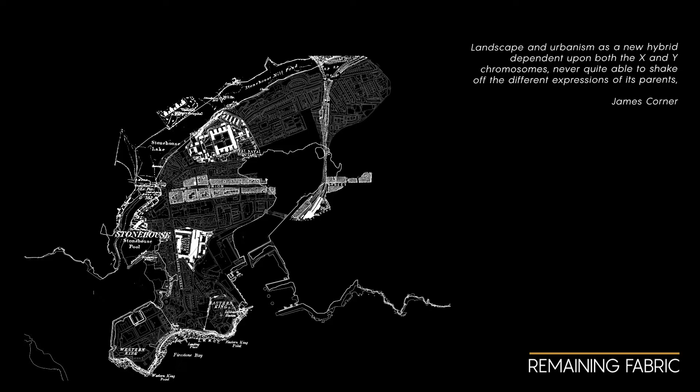This map analyses the impact of the climatic changes on the historical fabric of Stonehouse. The Union Street, which caused the north-south divide of the area, has broken down, and together with the reintroduction of Stonehouse Creek, connected the divided communities, giving them a direct link to natural landscape.

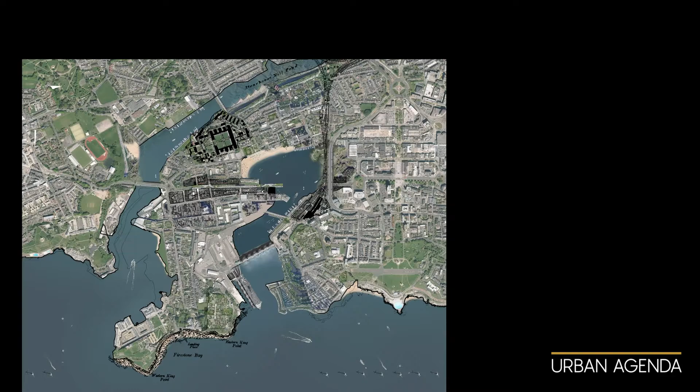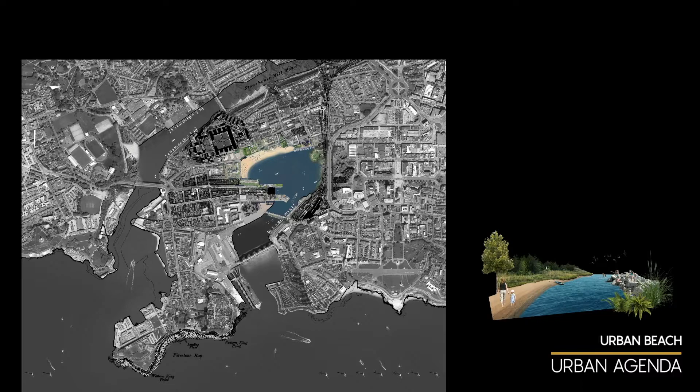This urban agenda brings together social, economical, and environmental aspects into one, giving the community areas where different types of wildlife thrive in marine environments such as salt marshes. This strategy incorporates leisure areas such as urban beaches, which can be enjoyed by the residents, who may also participate in horticulture and aquaculture that creates a deeper connection with landscape.

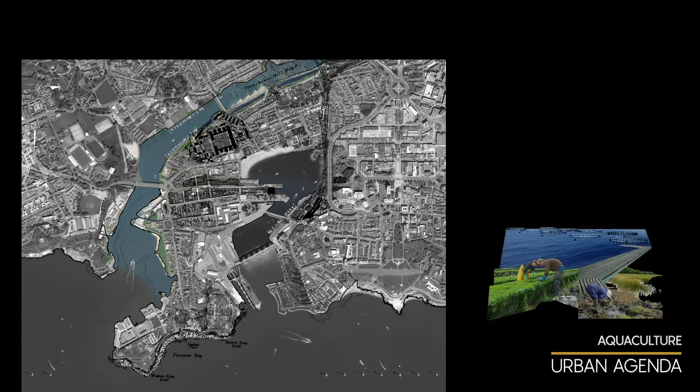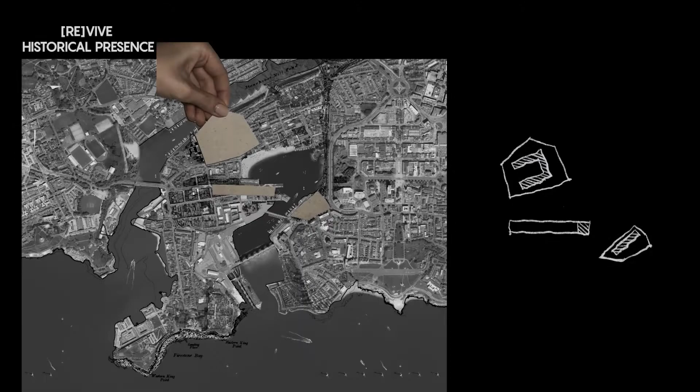Art promenades, transportational links, and new industries unite the urban environment at different scales. Our field of operation concentrates on 3 historically rich areas.

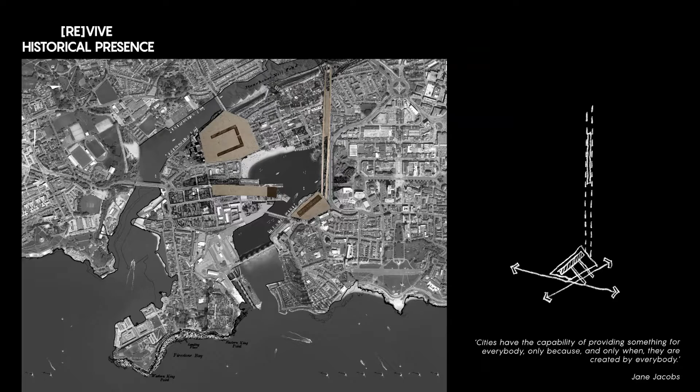Located on the edge of Millbay Cove, the site of Plymouth's first railway aims to reinstate its presence by providing a sustainable connection to Stonehouse.

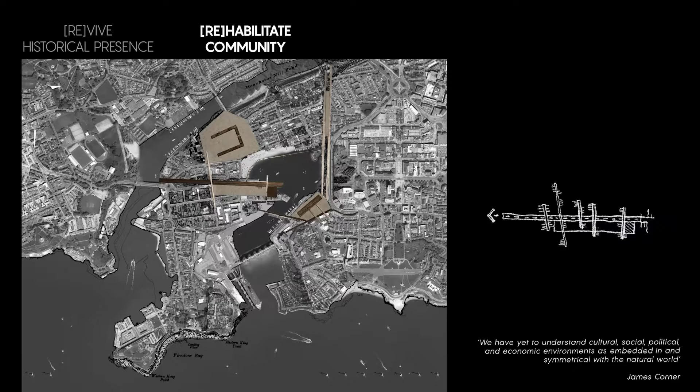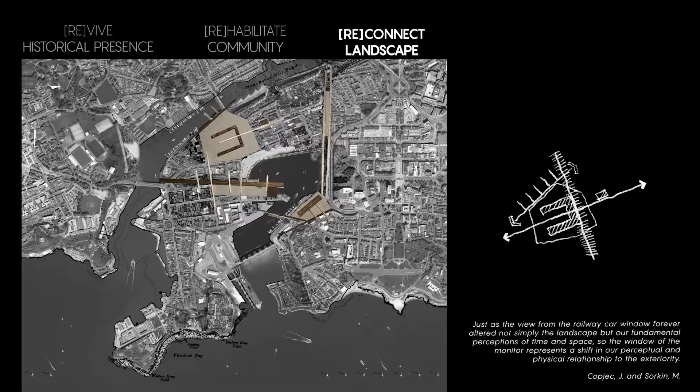Central area evolves around the Union Street Promenade. Building upon its rich history in arts and theatre, it aims to rehabilitate the community. The area of Millfields engages with its medical background, focusing on the well-being of the community, connecting to urban and natural landscapes. All 3 areas act as a catalyst of our urban agenda.

The first proposal is to be a wellness spa that will use biophilia and water to heal the physical and mental well-being of the site. This will sit just north of Millfields and descend towards the water's edge of the newly formed Stonehouse Creek.

The Shell of Memory is an amphitheatre closely connected to the waterfront that celebrates human connection to water. It stems off the already existing but forgotten arts culture of the Palace Theatre and aims to revitalise the cultural identity of the area.

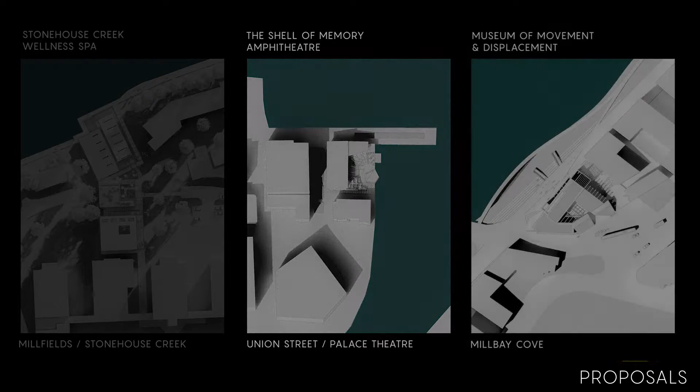Finally, there will be a museum of movement and displacement on the other side of Millbay Cove that will celebrate the site traces of the past, including a former train station that used to be the hub of movement in and out of Plymouth. The museum will showcase the journeys of the past and current displacements of people.

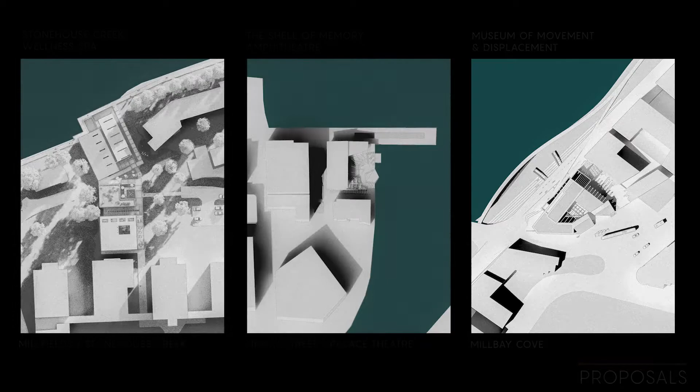Historical presence is evident throughout our projects in various ways. The journey of our designs is based on the historic traces. By reorientating and repurposing historical areas present in today's Stonehouse, we managed to maintain the area's rich history and culture, as well as integrate new proposals in the existing landscape seamlessly.

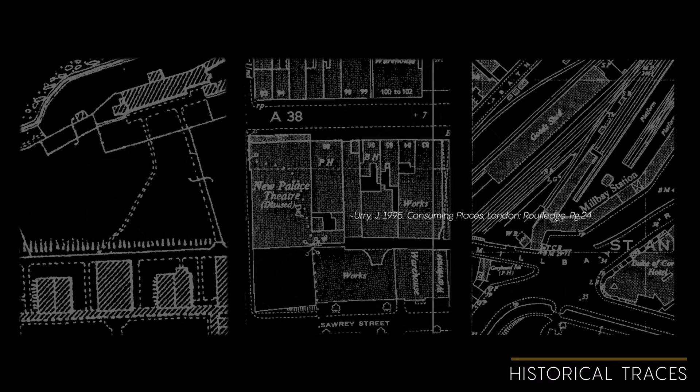Spaces are formed through time and are strongly based on memory and feeling. Embracing the current historical context allows for our projects to sensitize themselves within the area of operation.

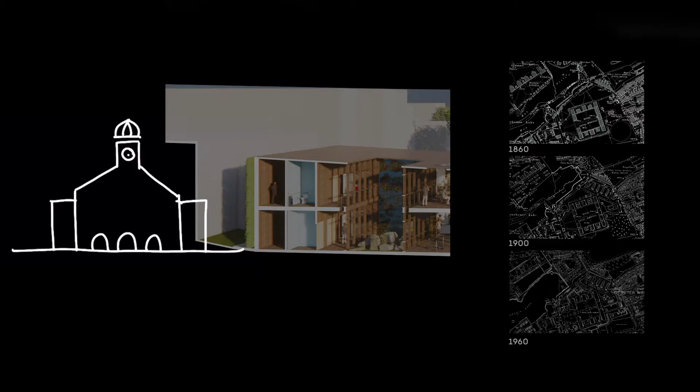The Wellness Centre branches directly from the historical Millfields Naval Hospital. It enhances and recreates the historically present healing energy that has existed around the area and feeds from the landscape as a way of healing people.

The project aims to re-establish the surrounding neighbourhood as a space dedicated to health and wellness, both physical and mental, and takes on a new and improved role through biophilic design.

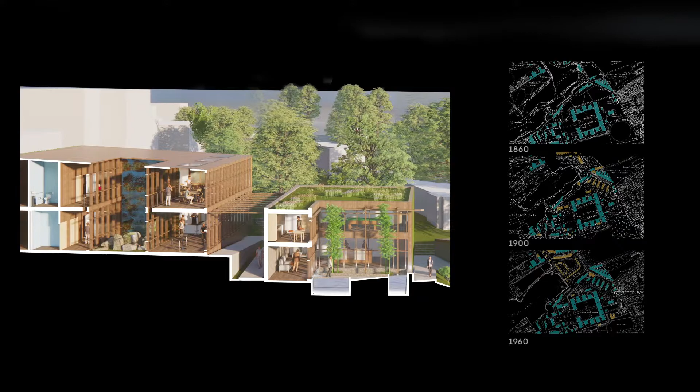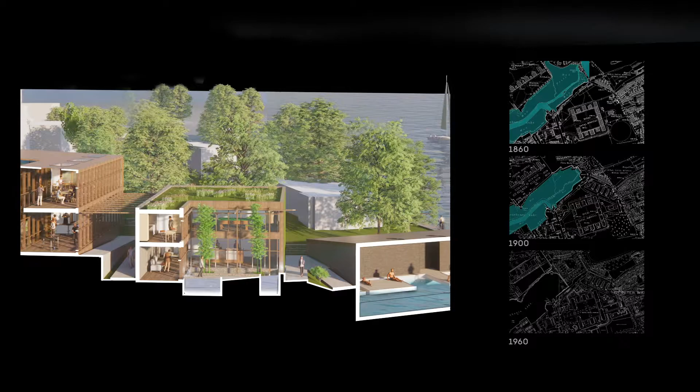Additionally, it situates itself within the historic context of Stonehouse Creek, an area that was once flooded with water, currently flush with greenery, that will work as a creek once again in our master plan situated in 2100.

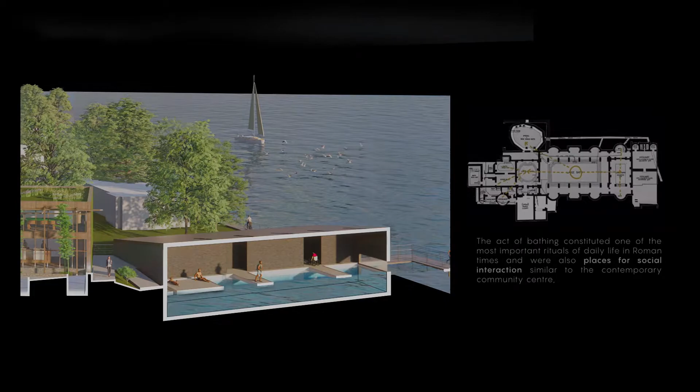The building draws upon historical references of Roman baths that explored the idea of healing through water and work with a classical architectural style which is evident in the proposal.

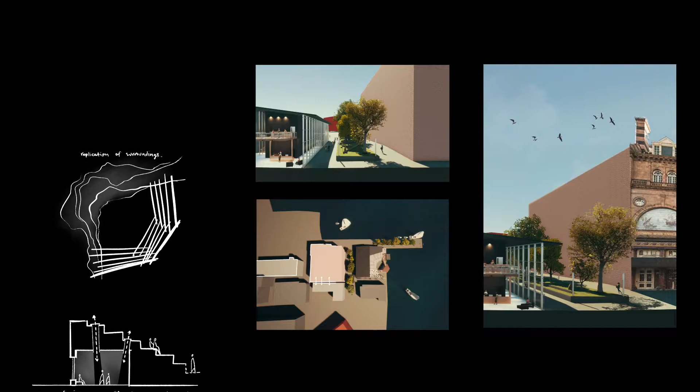The Shell of Memory is a project stemming directly off the history of the surrounding site, located on Union Street in Stonehouse. It is inspired by the already existing Palace Theatre, a currently abandoned and derelict building that holds much of Stonehouse's current connection to culture and the arts.

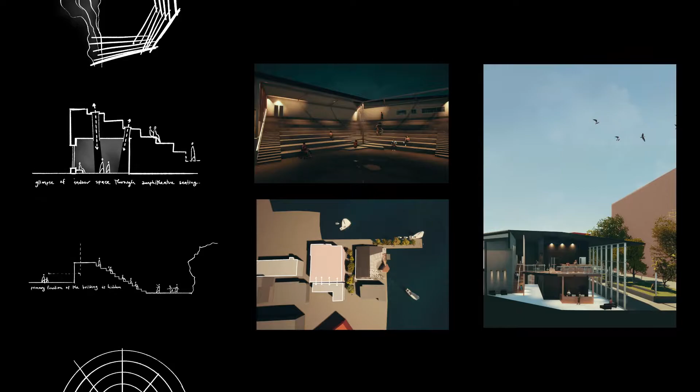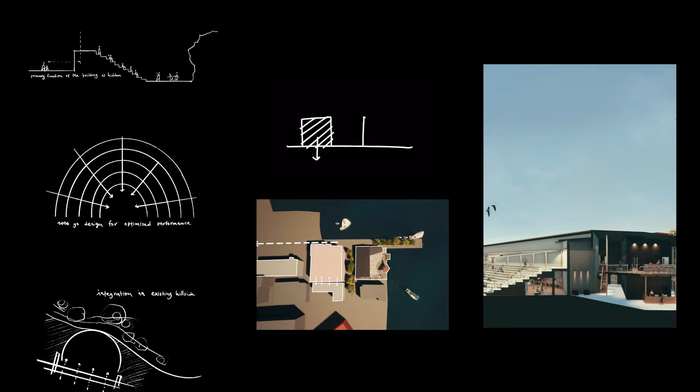The amphitheatre, along with the renovation and reopening of the Palace Theatre, aims to re-establish an area of rich culture and love for the performing arts right on the edge of the water. It acts as an opposition of materials and textures compared to the older building next to it and enhances the proposed landscape.

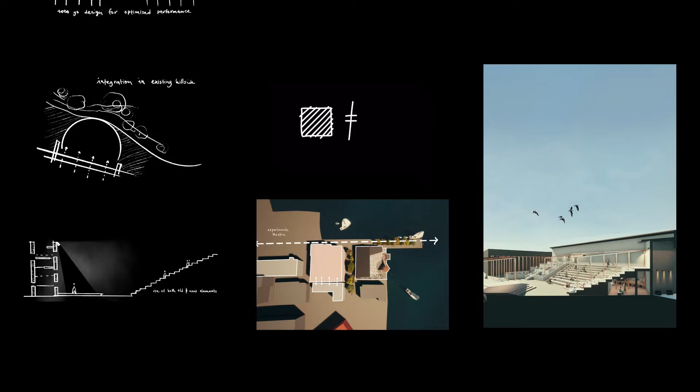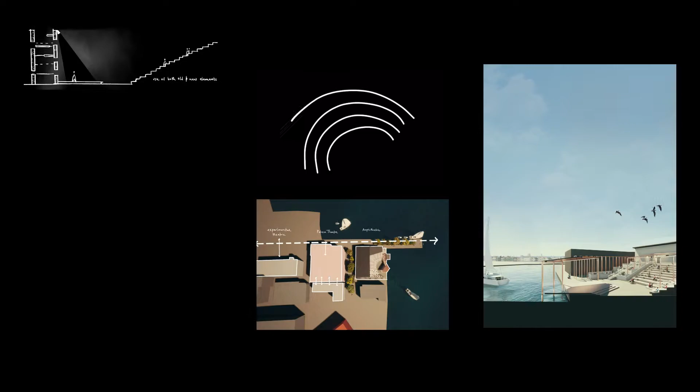Furthermore, it ties itself with the ancient amphitheatres around the world through similar elements and artistic practices, situated in a more contemporary landscape. It feeds off multiple historical areas in Greece and integrates modern materials and spaces within that historical context.

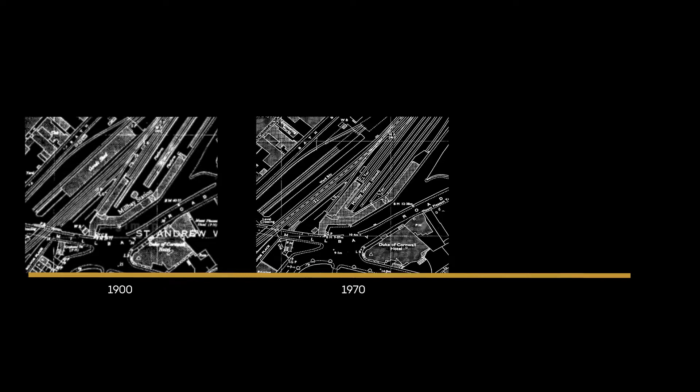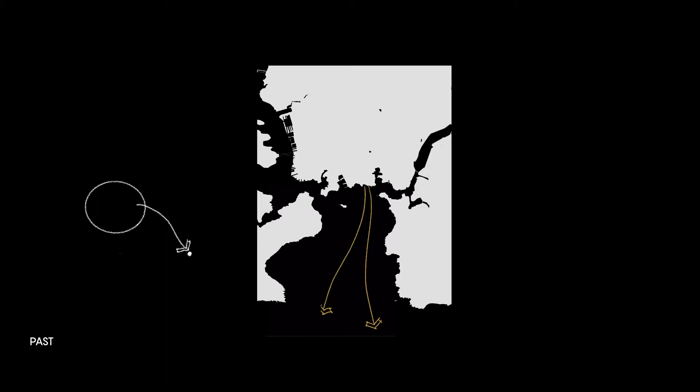The Museum of Movement and Displacement is based upon the historical traces of an area which once was the first railway station in Plymouth. Looking at Plymouth at a wider scale through the lens of a journey, the city has been a place of departure in the past and currently can be seen as a place of arrival with the more recent refugee crisis and various migrations.

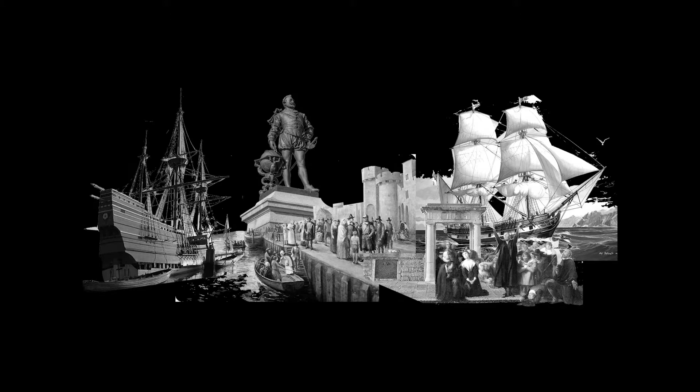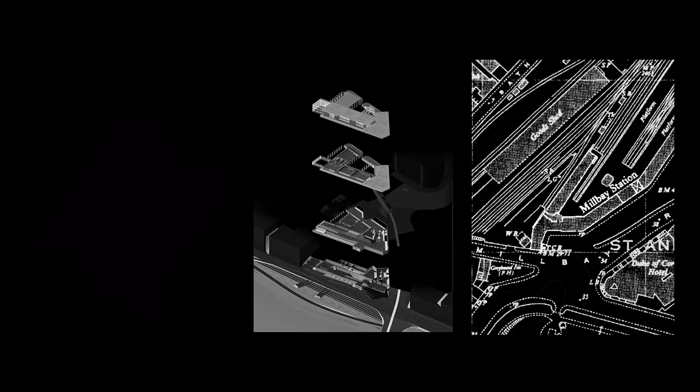The programme aims to celebrate and showcase this idea of a journey, movement and displacement, and take these historical traces and layers forward. The traces are present through the architectural fabric that uses the historical railway station as a backbone of the proposal. The strong edge activates the circulation and allows for the programme to take place. The linear tracks have been translated into features within the landscape, acting as connecting scars of hard and soft edges.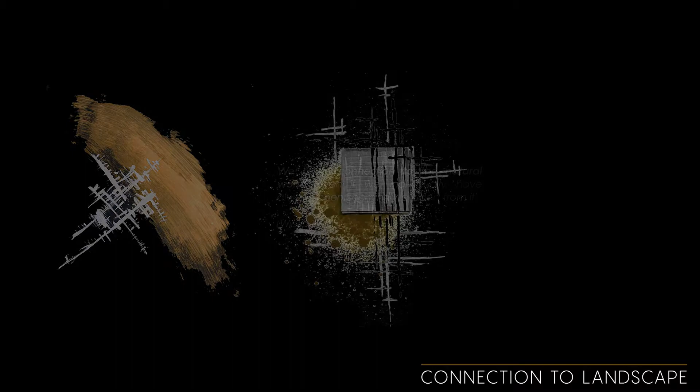The next theme we'll be delving into is the connection to landscape. This can be in multiple forms, such as connection to water or topography of the land. Biophilia summarises a distinct connection to nature, which goes hand in hand with a connection to landscape. The connection to nature is highlighted using various time-evolving materials such as copper, timber, as well as locally sourced stone. Additionally, the buildings use a space layering effect that integrates them better within their surroundings.

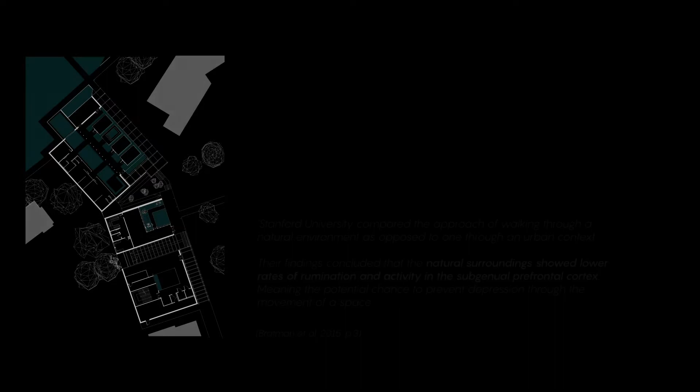One of the most important intentions of the proposal is to connect the users to water as they move through the building from Millfields down to Stonehouse Creek, the purpose being to increase the presence of nature and therefore start the healing process to their body.

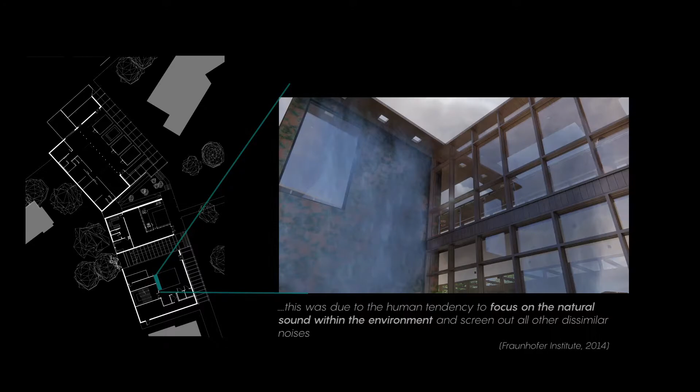The top building starts with a small water feature that harnesses rainwater to create an eroded facade within the courtyard of the bar and restaurant. Over time, this facade will adapt to the constant weathering processes the rainwater provides, so the wall becomes irregular and eye-catching even when there is no rain.

The middle reception and office building provides a larger pond courtyard space that visitors must navigate to enter the threshold. Sounds and smells will radiate from the water to quickly tap into the subconscious of the individuals. This biophilic relation has already been proven to increase one's well-being and reduce stress levels.

The final building is the spa, which contains the largest body of water throughout the proposal. There is an indoor pool that spans a large majority of the floor plan to direct visitors towards the creek beyond. Treatment rooms sit within this space like floating pods to continue the feeling of proximity to water and nature.

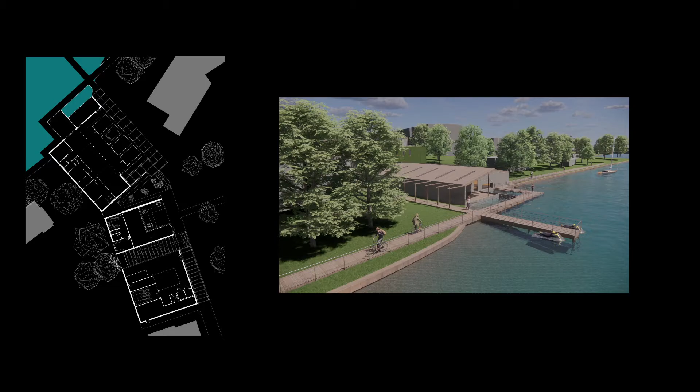Beyond the proposal, there is a natural pool that allows people to take advantage of the creek's presence with a controlled environment. Throughout the proposal, there are clearly defined views and traces to the water to allow a subconscious relationship that will in turn heal the individuals.

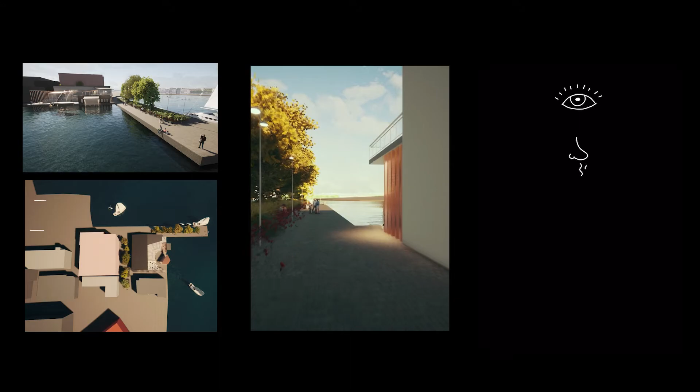The amphitheatre holds a strong connection to the surrounding landscape through bordering and overhanging the water, allowing visitors to interact through their various senses with it. From promenading towards the water to constantly absorbing the sounds and views, as well as being able to physically interact with it, the programme works as a connecting element between man and nature.

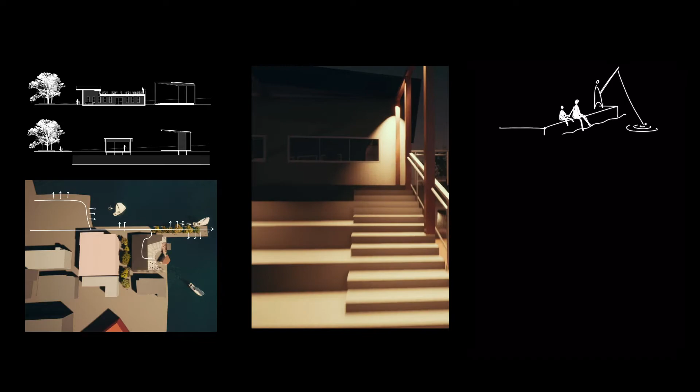Stepping down from the amphitheatre with a direct view to the sea amplifies the visual connection and allows for a gentle and natural approach to the water. The stage, as well as part of the backstage set storage area, overhang the water and create a sense of unity between man-made and natural.

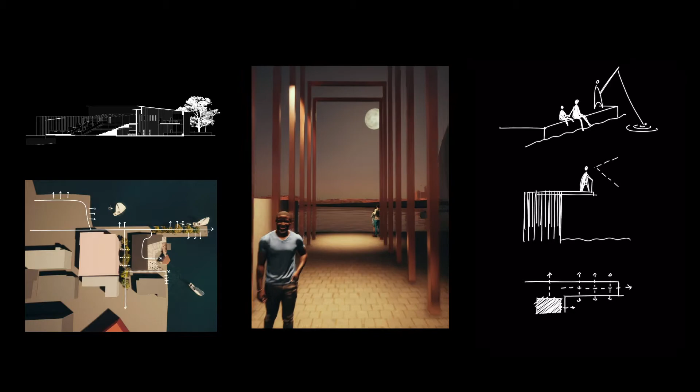Additionally, the archway located at the southmost part of the project allows for a gentle incline and promenade towards the sea. The material used in many of these structures, copper, allows for a gradual change in colour and texture, amplifying the effects of the water over the programme.

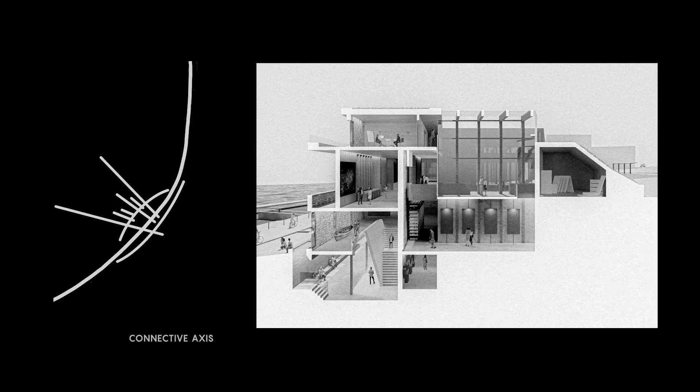The building integrates itself seamlessly with its surrounding environment through two distinct levels of operation. The top level acts as a connection to the urban landscape, creating links from the museum to the rest of the neighbourhood and city. Simultaneously, the bottom level creates a strong tie between the programme and the landscape through the waterfront promenade that spans throughout the area. These two levels work together to create a strong union between man-made and natural elements.

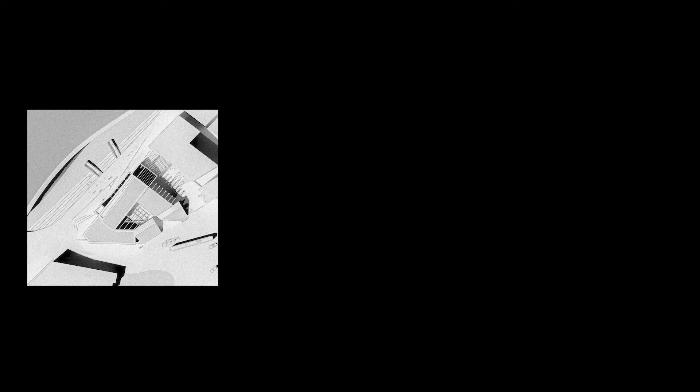These ideas are also reflected in the exterior landscape design, mainly based on the precedents of the New York Highline and Tadao Ando's work, integrating the notion of layering and level change in the existing topography.

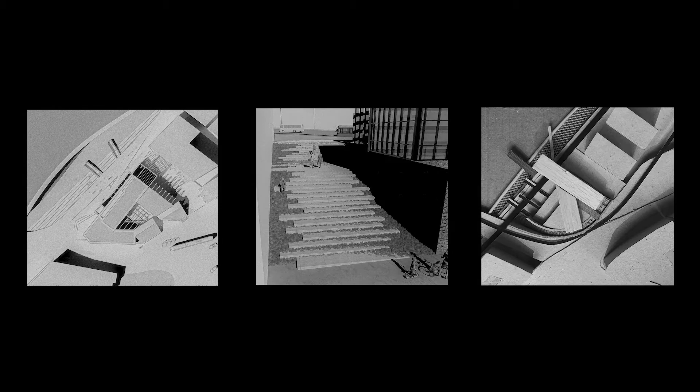One of the key elements evident in our projects is the idea of journey through the building and how this acts as a ritualistic practice. A ritualistic practice, in our case, is defined as a non-ordinary action, as stated by Grimes in the Craft of Ritual Studies. It is a rare event that connects individuals with their surroundings in a special state of mind and situates them in a special place or time. All of our buildings work to enhance such practices and encourage them to take place.

The Wellness Center focuses on the mental and physical connection of individuals with their landscape. It acts as a bridge between natural and man-made, allowing for a close relationship between the two. The expansion and contraction of spaces, as well as the play with light throughout, creates moments of pause and contemplation that act as ritualistic practices for people looking to better connect with themselves.

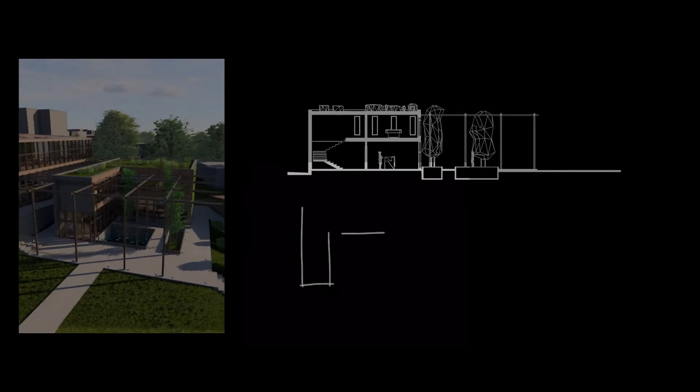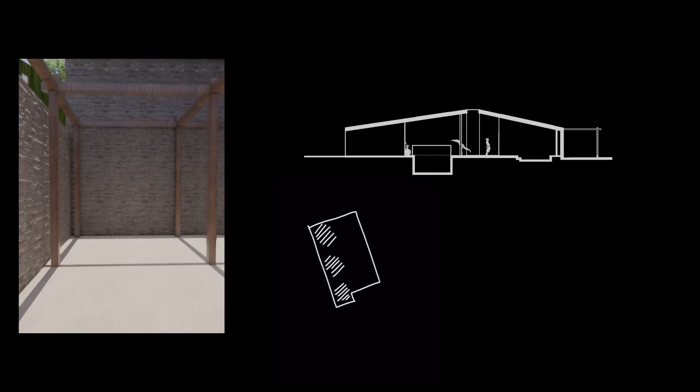The specific programs in the building create moments of contemplation and self-evaluation, as well as various amounts of interaction with others, allowing visitors to engage in different ritualistic practices that enhance both their physical and mental health. Healing itself is often seen as a ritual of sorts that allows for a better understanding of oneself and helps situate one within their environment. This notion is present throughout the program and creates a true sense of ritualistic practice.

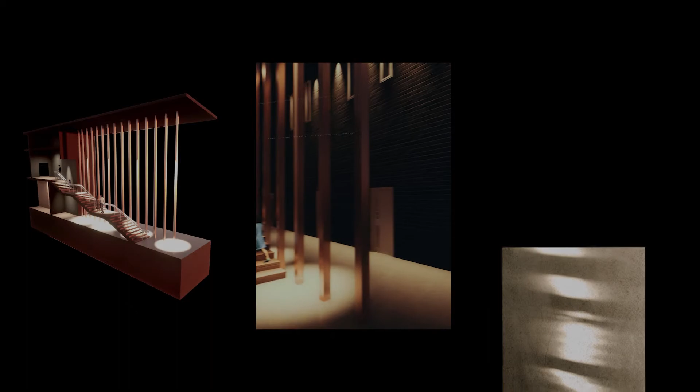The Shell of Memory celebrates specific ritualistic practices through movement and visual connection. The journey from the interior of the program to the exterior amphitheater space allows for an immersion of the senses and a sense of revelation once you reach your destination.

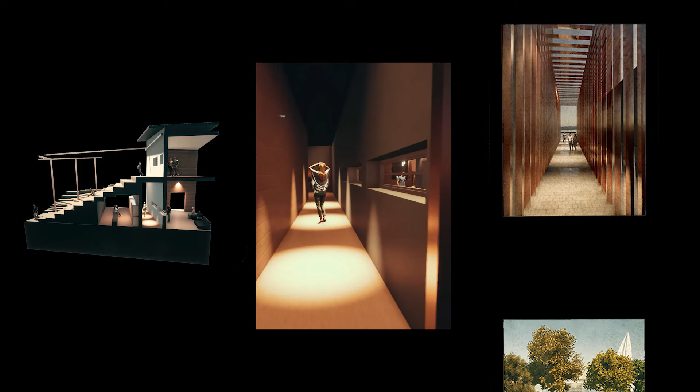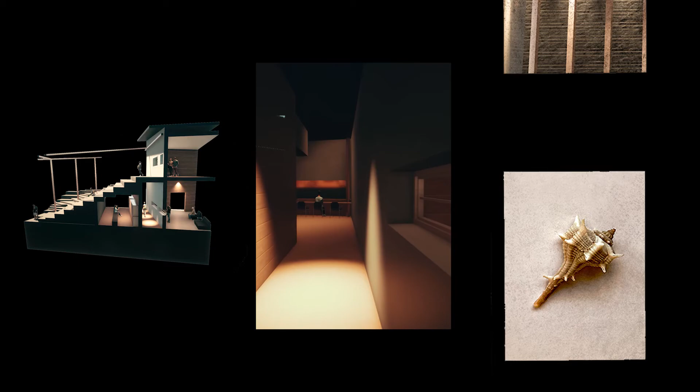Spaces go through constant expansion and contraction, allowing the visitor to experiment with their presence throughout the building. Additionally, the visual connection of the backstage area through glimpses of hidden activity helps visitors immerse themselves into the theater world and better understand the hidden activities that make up a finalized show.

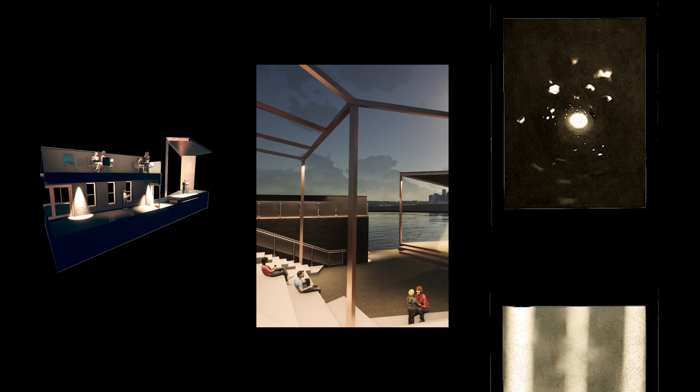Finally, the act of watching a show acts as a ritualistic practice itself, as the visitor has to take part in this exchange of information and immerse themselves into the outdoor environment, evident in the background water views as well as the ongoing show taking place on the overhanging stage.

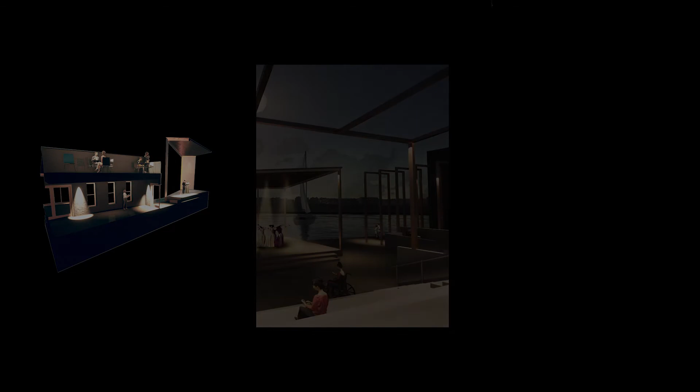The journey through the museum allows for an individual to immerse themselves in memories and past historical experiences, as well as create mental connections within this new environment.

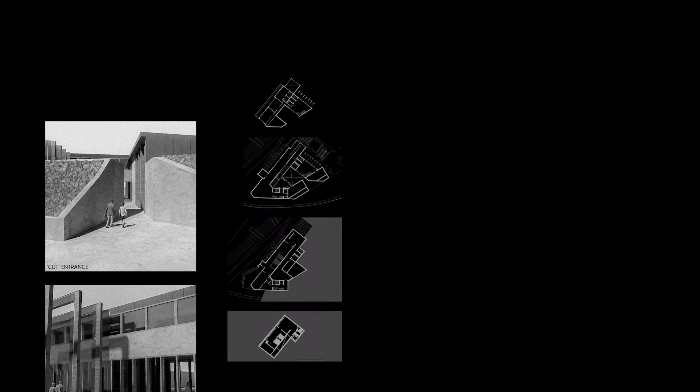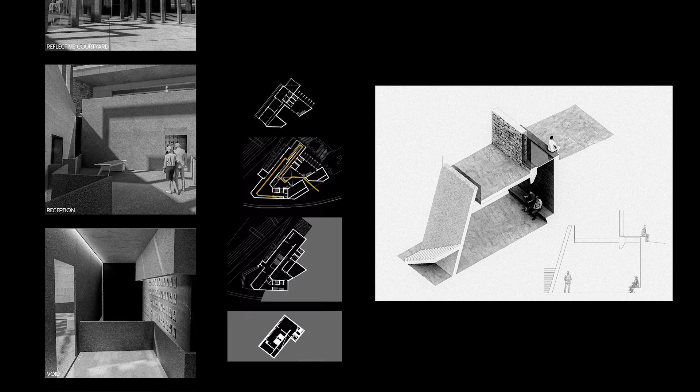This is evident through the rich use of materiality, as well as play with light as a stimulant for the visitor's senses. Spaces of movement and pause act as places of contemplation and create rich ritualistic moments that enhance the individual's emotions and feelings throughout the program.

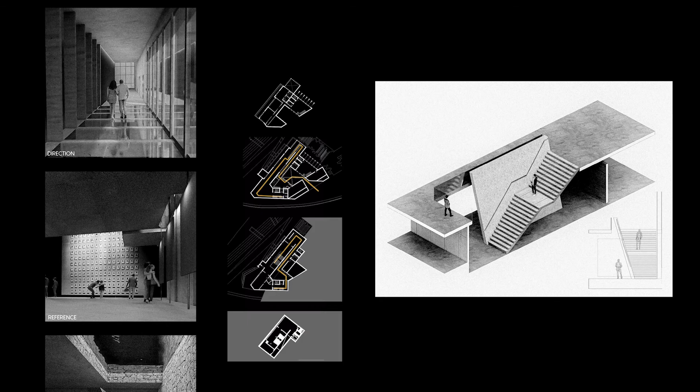Specifically, the journey down the distorted staircase with the integrated cork wall creates a very rich sensory experience that allows a person to truly situate themselves within their context.

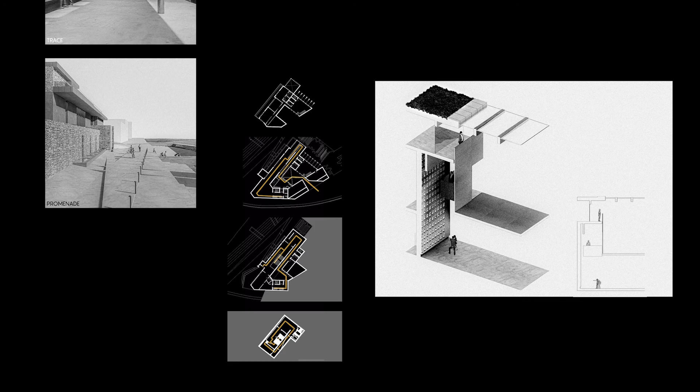Additionally, the presence of cork and steel, both as an element of support and journey through the building, allows for a multiplicity of feelings throughout the spaces. It creates spaces of disconnection as well as visual connections from various parts of the building, working to unify the program as a whole.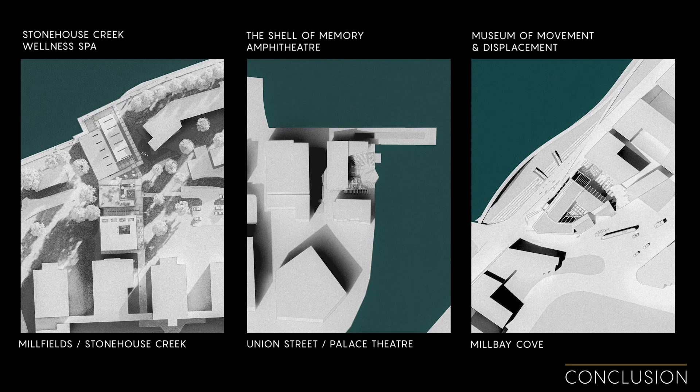Through these three different themes, historical traces, connection to landscape, and ritual journeys, we have managed to create three individual proposals that work together seamlessly to complement our urban agenda.